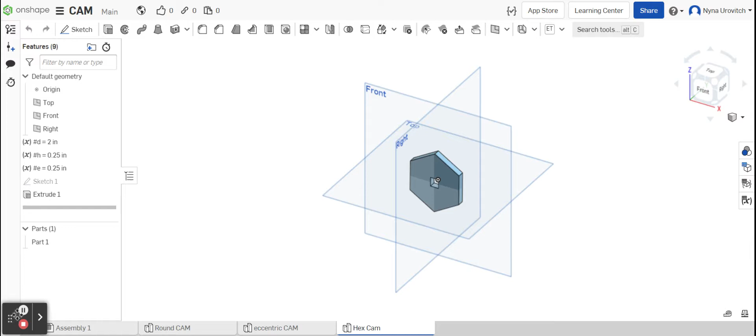I just renamed the hex cam. Now I'm going to create a new part, and it's going to be called the Pear CAM. Let's begin by creating a new part page. It's called Part Studio. I'm going to go to front view, and the Pear CAM is basically two circles with two lines tangent.

I'm going to start by writing out our variables. Here we go. Whoops, let me go variables. I go add variable. The first variable is D, and that is for our nominal dimension, and we're calling that 2 inches. Oops. Our next variable is going to be the hole, which we call 0.25 inches.

We're going to create a square for the hole. And the last one is the extrusion, and that is also 0.25 inches. We are all set with our variables. Now we're going to go to a sketch, and we're going to draw an arc, a 3-point arc.

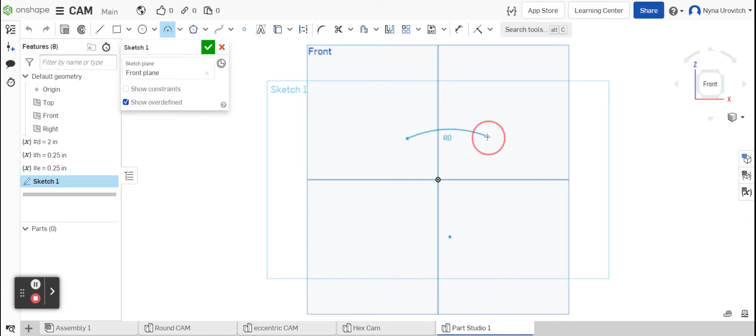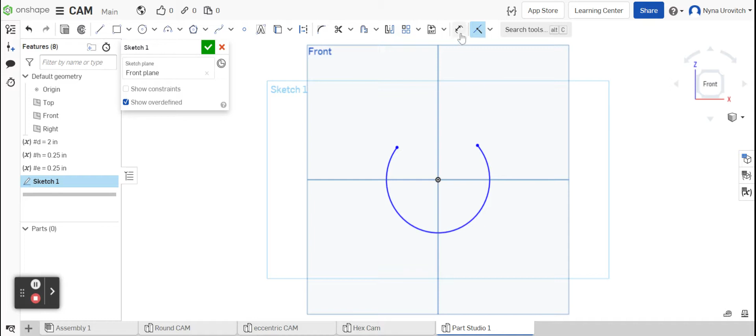I want to do first point, second point, and my third point is something like that. Okay, I'm going to move it so that the center of the arc is coincident with the center of the circle. Here it is. That looks good. Next I'm going to size this arc. This arc is D over 2, so I'm going to go to the dimensions and size it. There we go. We have our first radius.

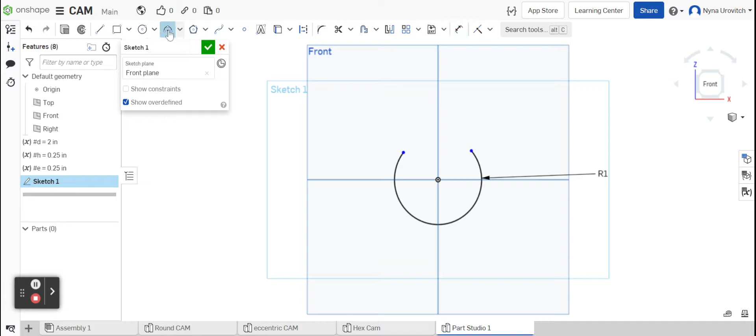Now we are going to create a smaller arc facing the opposite direction. There's one. Whoa, I did not want that one. Let me delete it. Do it again. 1, 2, and 3. Okay. I'm going to size it, and it is D over 8. Okay, there you go, D over 8.

We're going to make it so it's coincident with the center line. Here's 1, here's 2. Now the distance between the two centers is D over 2, so I'm going to dimension it between here and here. I have D over 2.

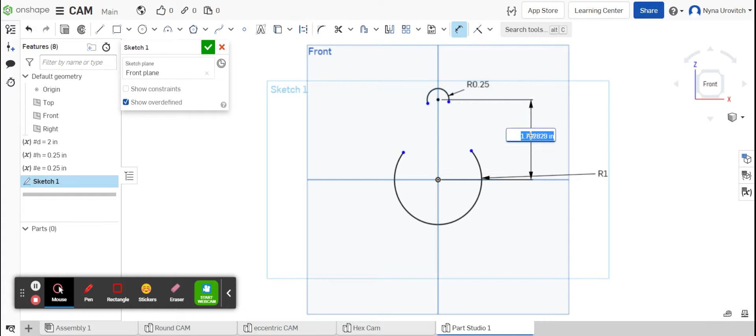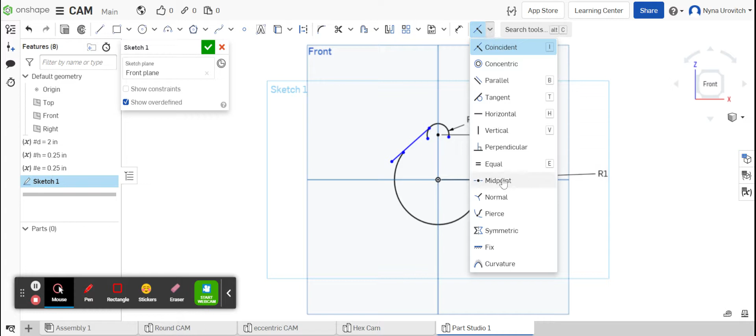And now, whoops, I want to go back into my sketch. I'm going to do tangent of the arc and then of the line. That should work. Next, I'm going to do another line. So let's do a line draw from right around here to there. Let's see if I could get those tangent. Okay.

I'm going to select the tangent constraint. There we go. So let's see what my constraints are. I should see a lot of different tangent lines. That's exactly what we're looking for. Now I'm going to do some trimming. So I have my scissors. That did not work.

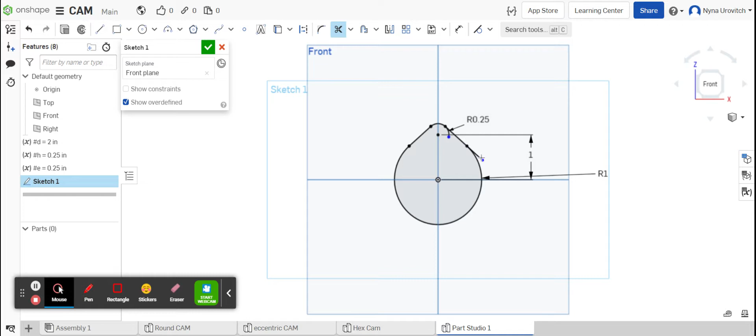Okay. Now that's nice and tangent. Now I should be able to do my trimming. Great. Excellent. Okay, I just want to make sure that these are nicely tangent, and they are. Now I'm going to do some trimming. And our Pear CAM is done.

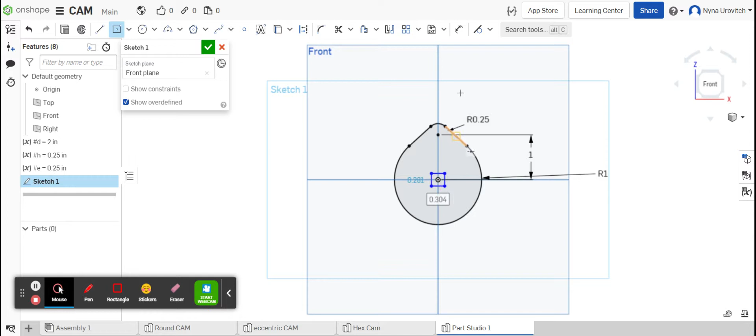The next thing we're going to do is create the hole in the middle, which is going to be a center point rectangle. I know the drawing calls for a circle, but our dowel is going to be a rectangle, and I'm going to dimension it. Okay, let me do it again.

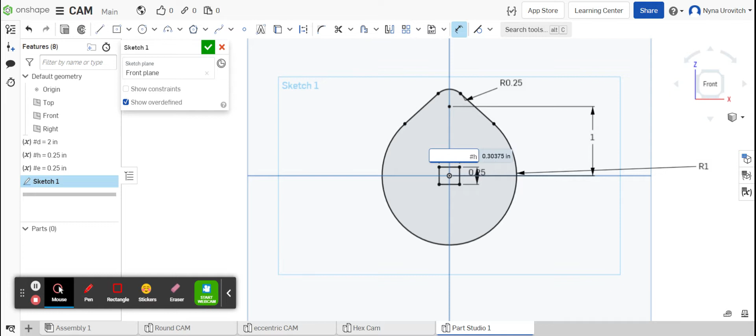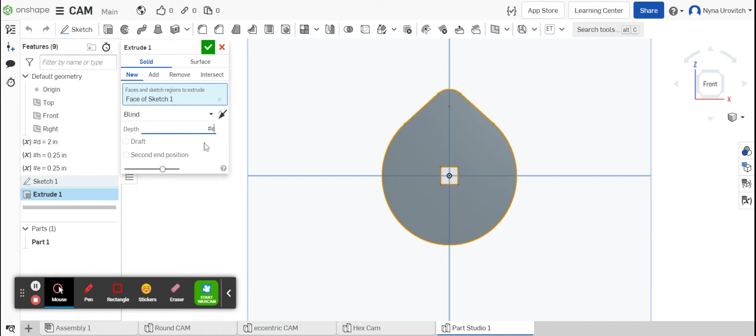Okay, our sketch is done. I have the Pear CAM. It looks really good. Now I'm going to extrude it. So I'm going to select it and extrude it. The amount I'm extruding it is whatever I set my E to be, which is 1/4 inch. And done. Let's look at the isometric. Beautiful. It was a tricky part, but I think you could do it.